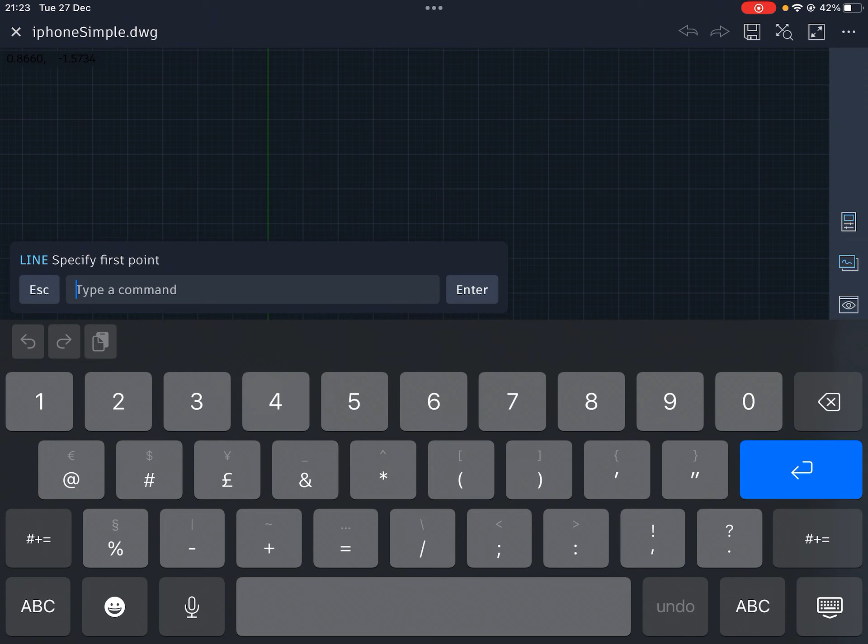So I'm going to go to draw, line, and we want to start from 0,0, the UCS. Remember, don't try and guess it, type it in. So I'm going to type 0,0 for the X and Y coordinates, and click enter.

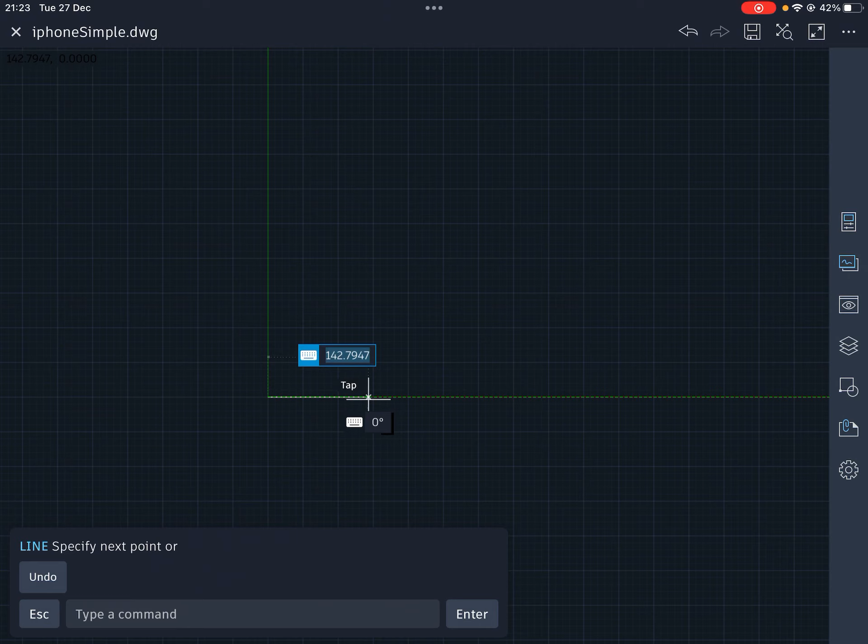Then I'm going to draw a line across, and I'm going to make this line 68 millimeters. So I'm going to tap the little keyboard icon till it pops up, type 68, then tab, 0, because I want a straight line.

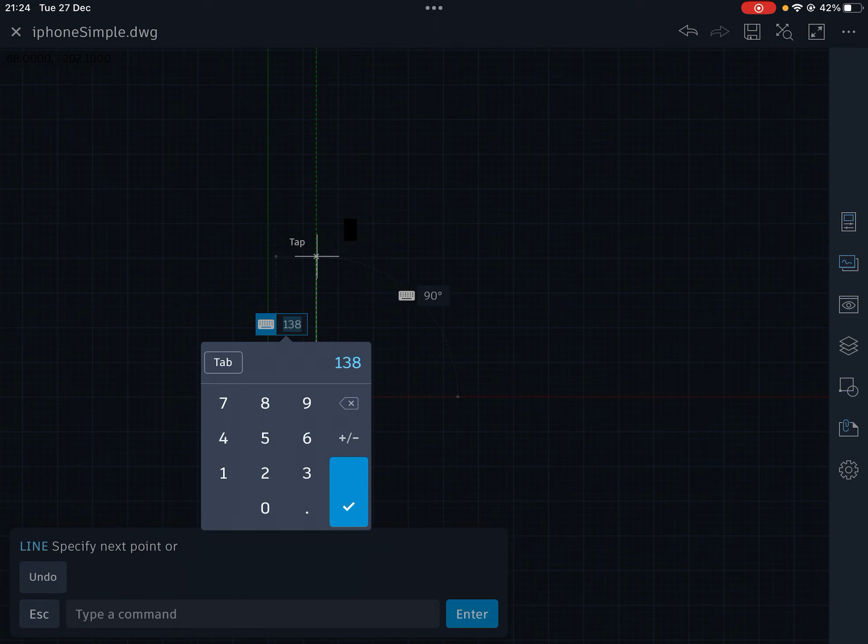I can now scroll up the page, so I'm going to put my arrow pointing up. Now this needs to be 138, so I'm going to click the little keyboard icon, type 138, tab. We're going up the page now, so it's 90 degrees.

Click OK. Now we want to go back on ourselves across this way, which is going to be 180 degrees, and this needs to be 68. So tap the little icon again, 68.

Tab, 180, correct, enter. The last one, we can use the snap function and snap down to the line. Just get the little zoomed in green square to confirm we're on the end of the line. Click enter. At this point, we can click escape - remember, don't press close. Now we've got our first square.

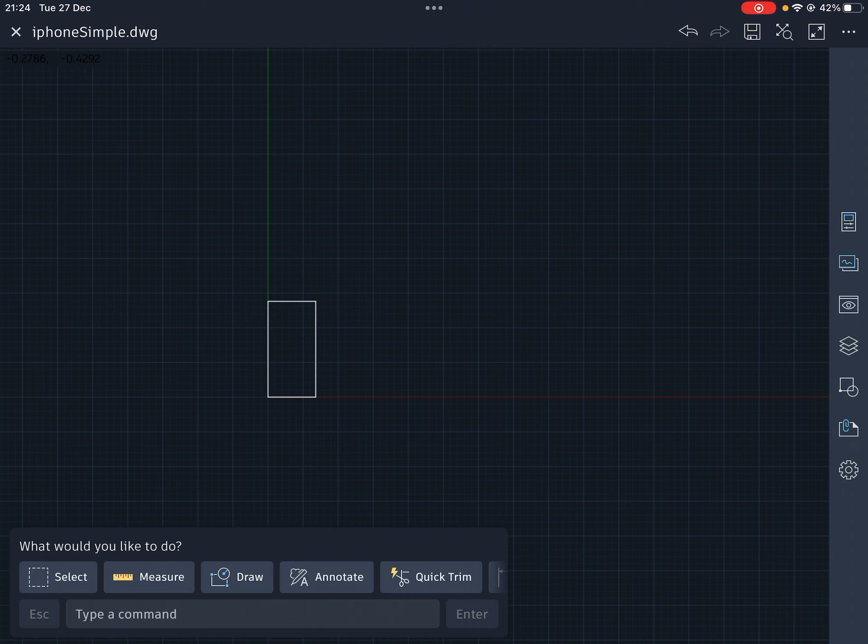I'm going to zoom in so it fills the screen, or more or less fills the screen. And the next thing we need to do now is put our screen on. So I'm going to do draw, line, and roughly put it where I want.

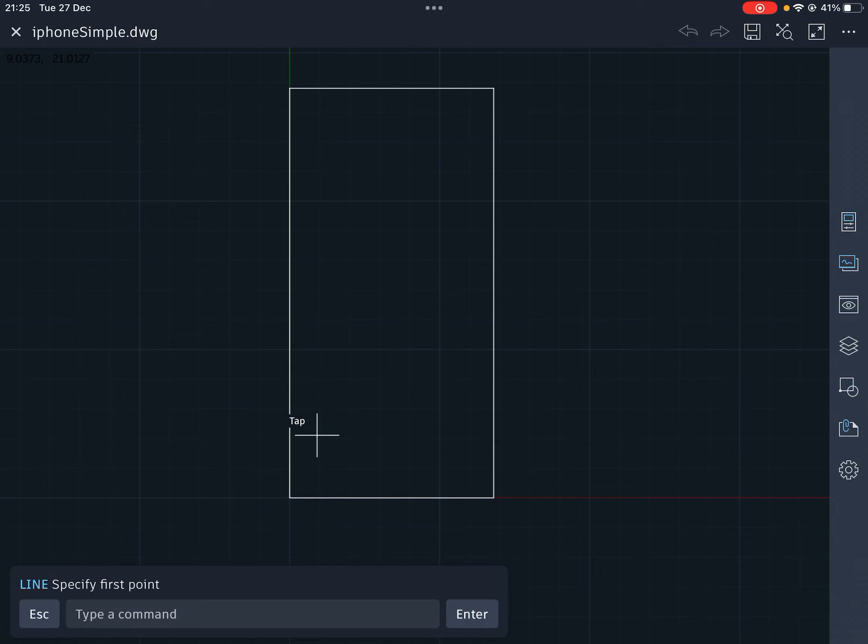Now, we can't guess this, so we've got to look at the drawing, and the drawing says that the screen starts 4 millimeters across and 17 millimeters up. So I'm going to type 4, 17 for our X and Y coordinates, and click enter.

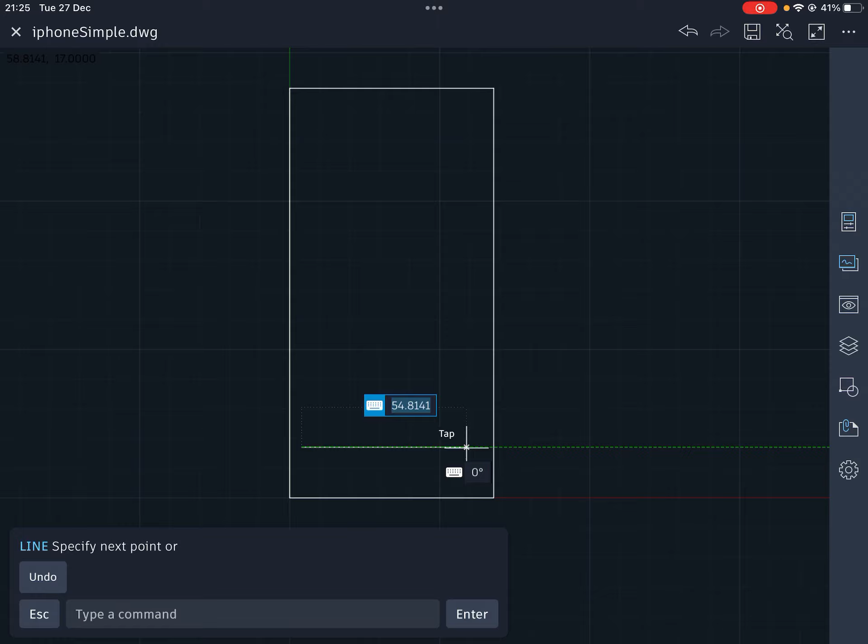Now we can go whichever way we want. We'll go the same way as we did last time, so we're going across. And if we look on our drawing, we can see that the screen is 60 wide - 60, enter.

I'm going to go up. We know our screen is 104 tall, so I'm going to go 104. Just quickly checking that I've got 90 degrees - I have.

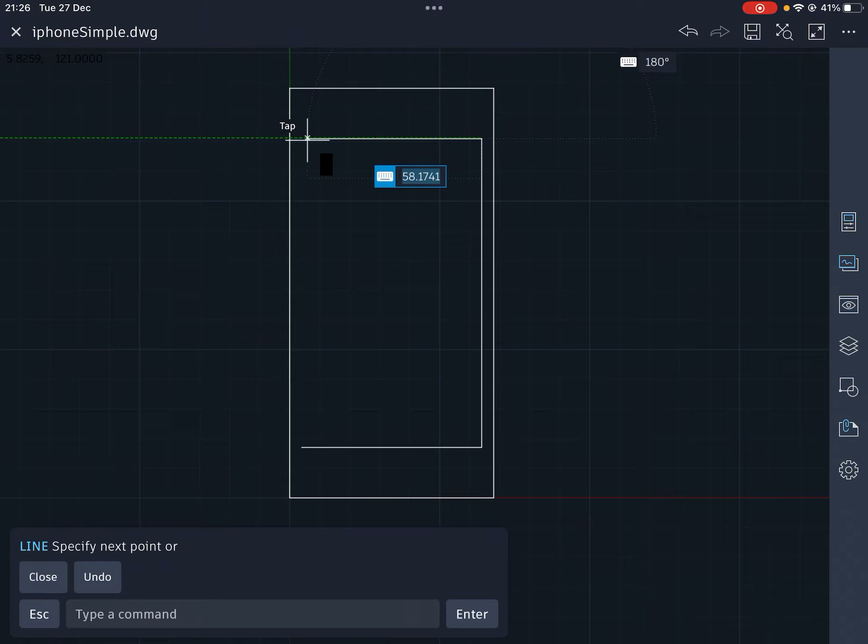Then I can go across. Again, the screen is 60 millimeters wide, so I'm going to do 60, enter. Then we can cheat with the last one and do a snap down to where we started.

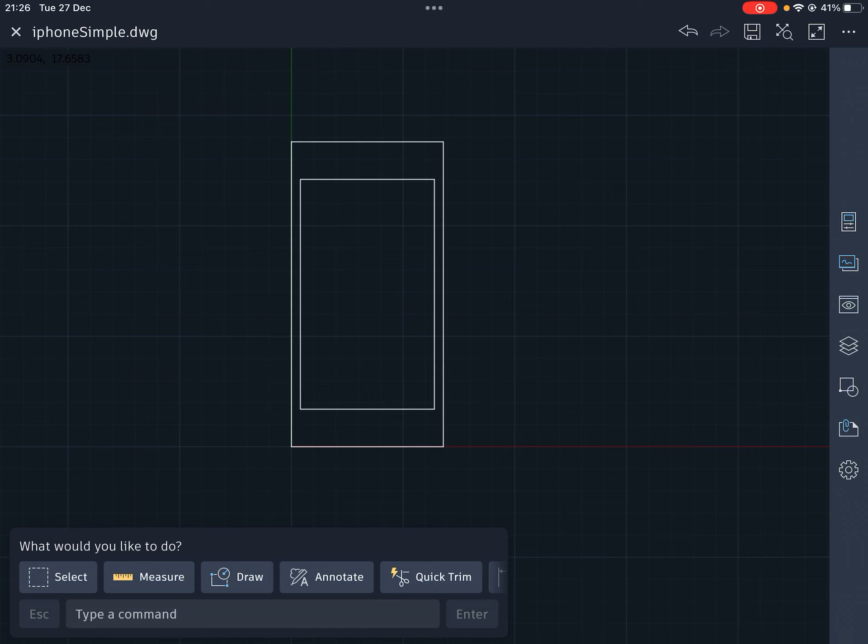Tap, escape, and there we have our two rectangles - one for the body of the phone, one for the outline of the screen. So the next thing is the fingerprint button.

So I'm going to zoom in, go to the draw command, and click circle. Again, we can't guess, but we can look at our drawing and see that the button is in the middle, which is 34 millimeters across.

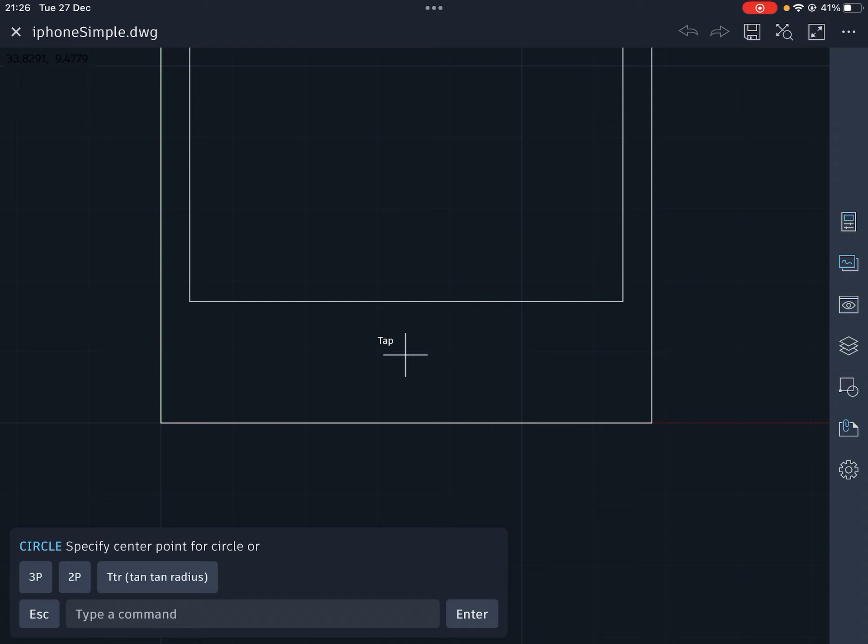So we're going to go 34 millimeters across. Looking at the drawing, it is 8 millimeters up. So I'm going to click on 8, click on enter.

Now then, we've got the circle and we can zoom it in. Again, never try and guess sizes in AutoCAD - I'm going to type them in. So it says a radius of 5.

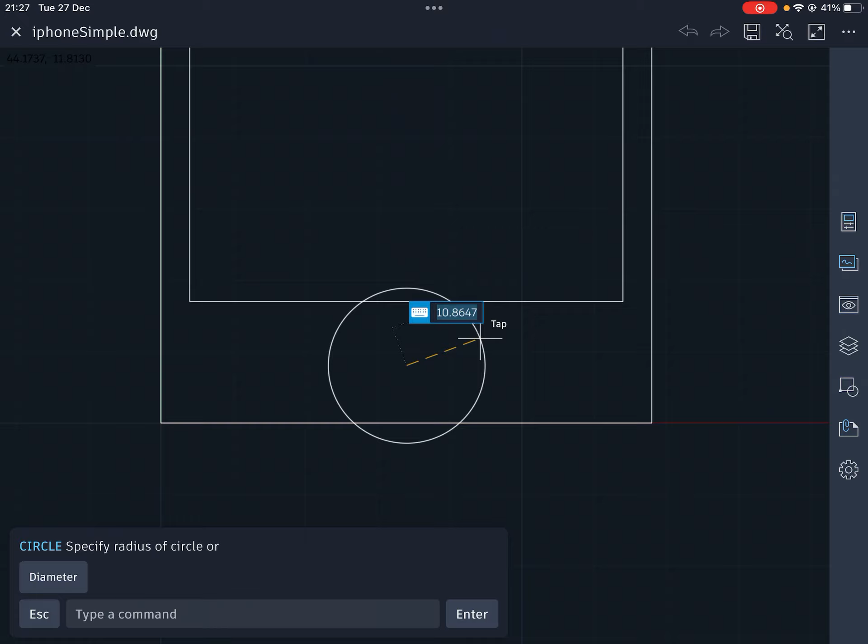So looking at the toolbar, the circle is in radius mode. It's saying specify a radius. So I can simply click the keyboard, click on 5, click on enter, and there we have our fingerprint sensor added in the perfect position.

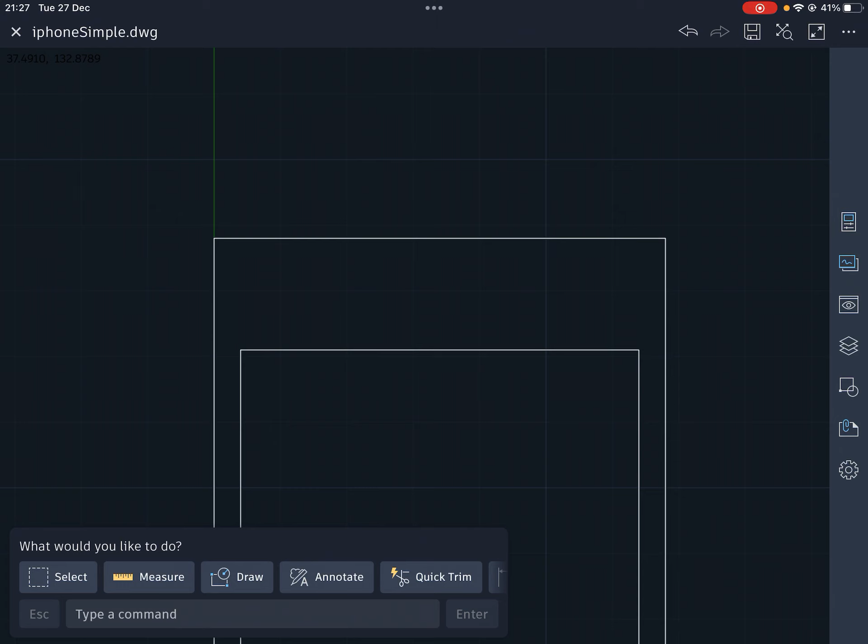Let's now scroll to the top and do exactly the same again, but this time for - I think it's the little camera hole. So I'm going to do draw, circle, put it roughly where I want it.

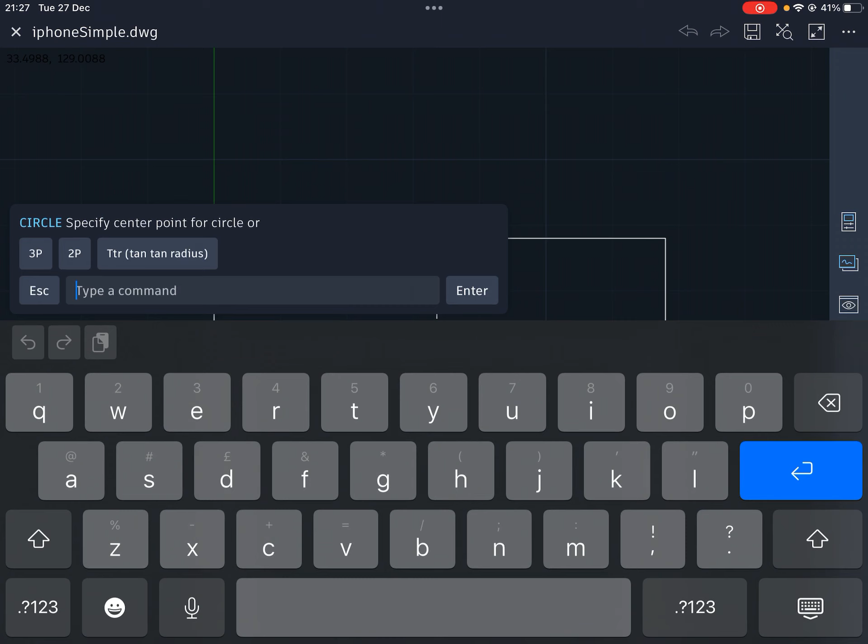Then we're looking at 34 across from the drawing. Now this time it's a little bit more complicated - it's 5mm down from the top.

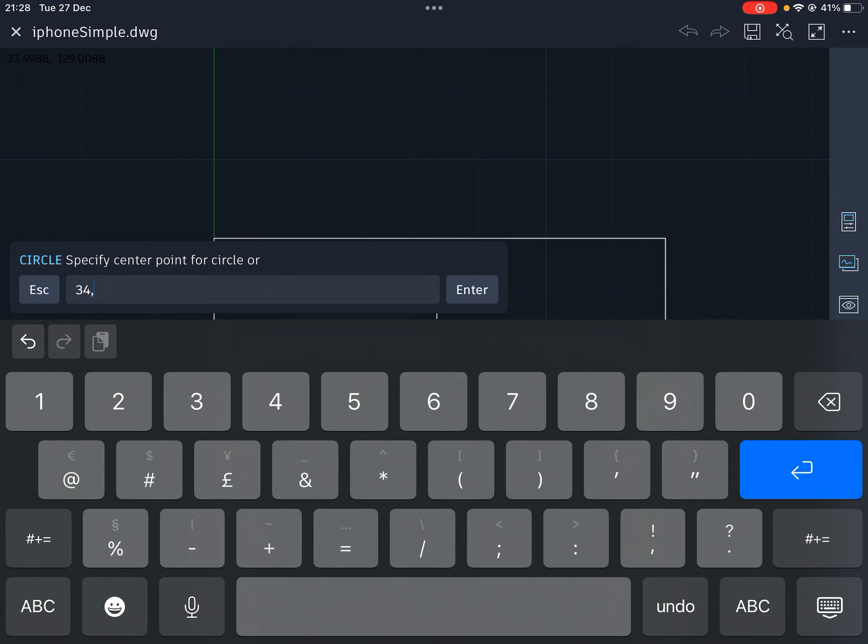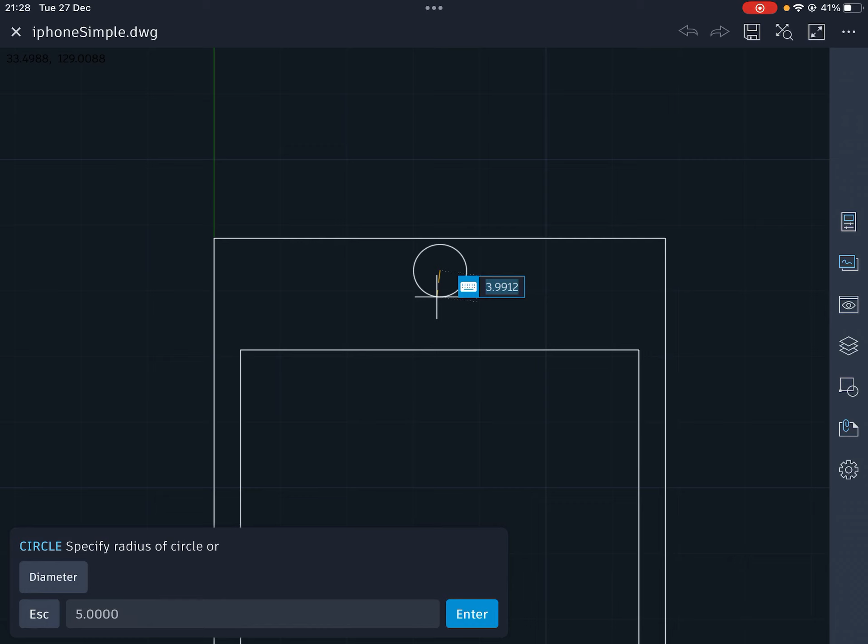So we know the whole thing is 138. So 138 minus 5 is going to give me 133. Enter. Now then, the camera diameter is 4.

Or 2 - so I'm going to type 2, click it. So the diameter is 4, so the radius is 2. I'm going to click enter, and there we have it.

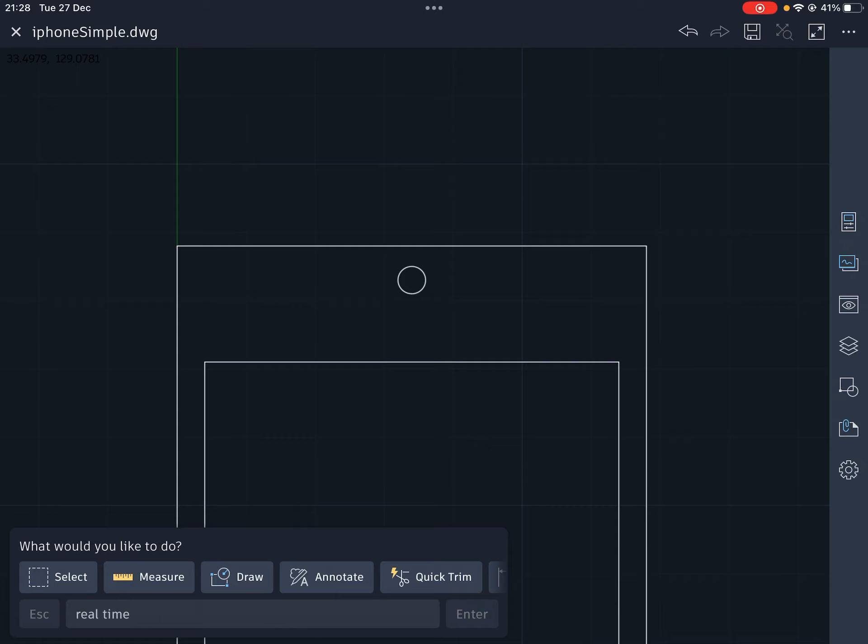If I zoom out to fill the whole thing - just note in the top right hand corner there's a zoom all icon which you can use to zoom out, but I prefer to do it by simply touching the screen. And then we have our first step of our very simple phone design.